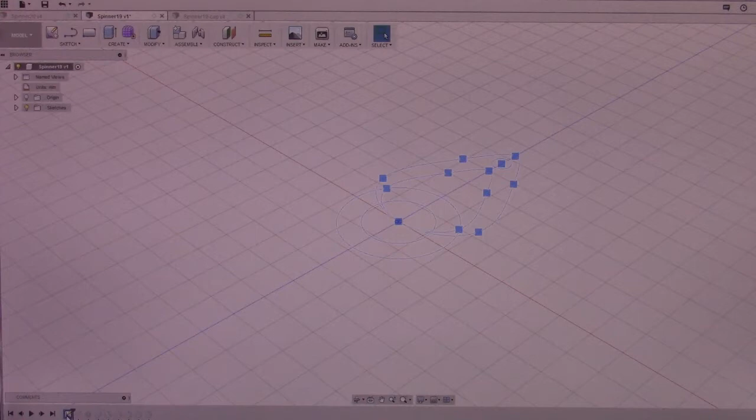So how this is designed, you have the center circles as usual for the placement of the bearings. And then I have a spline that goes out all the way, comes back down, and you can see the points where the spline was placed. And then the same thing, this one was actually resized to fit this size, that way it was uniform and I didn't have to recreate the spline. And then I created the circle that will be extruded or cut out in the final for the placement of the 1/4 inch ball bearings.

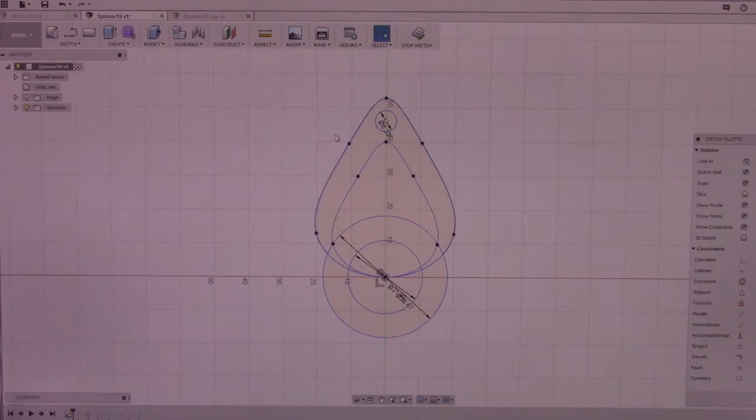So I extruded that design out for the initial one, and then I did the circular pattern to copy it around like this.

And then I did a combine simply to make the fillets work more like what I was expecting them to. If you don't do a combination before you do the fillets, sometimes you can have odd things happen where it wants to do a fillet in the reverse position than you think it should be.

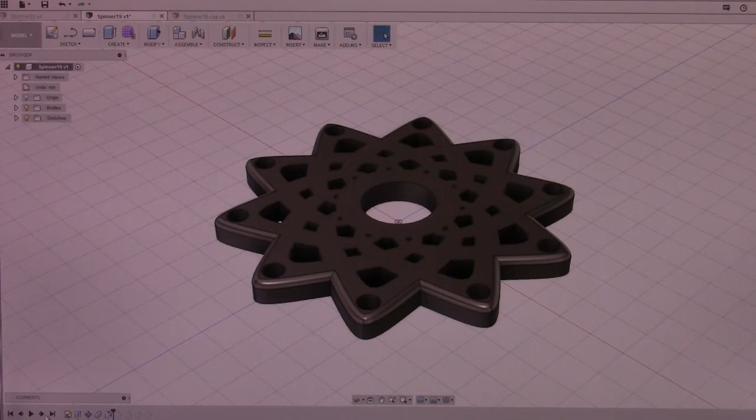The hiccups are getting worse. Anyway, I did a fillet on the outer edge, then a fillet on the bottom outer edge, and then fillets around all the holes. That second one was doing this section on the bottom, and then I do the same on the top with the next. You could go ahead and do smaller fillets for each one of these as well, but in the case of this, that's selecting 5 lines for each one. So with the 2 sides and the 10 going all the way around, that would be about 100 lines that you have to select just to do that row.

So for this design I didn't mess with it. You're welcome to do whatever you would like with your own designs.

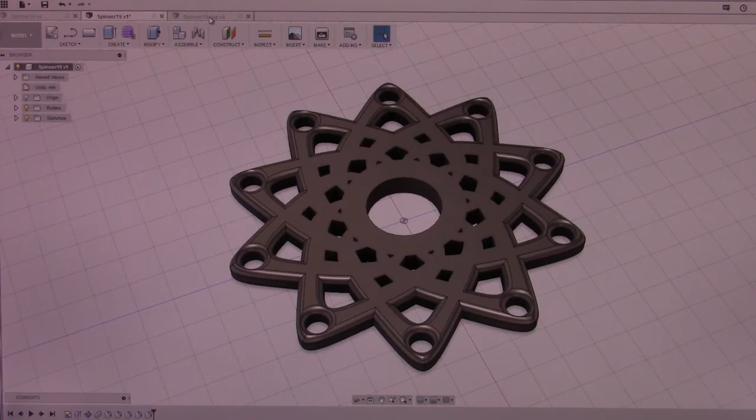The cap for this one, I went with something different. It looks the same from the top, and I've started doing split caps, which actually helps them fit better. But I went with like a flower design on the inside.

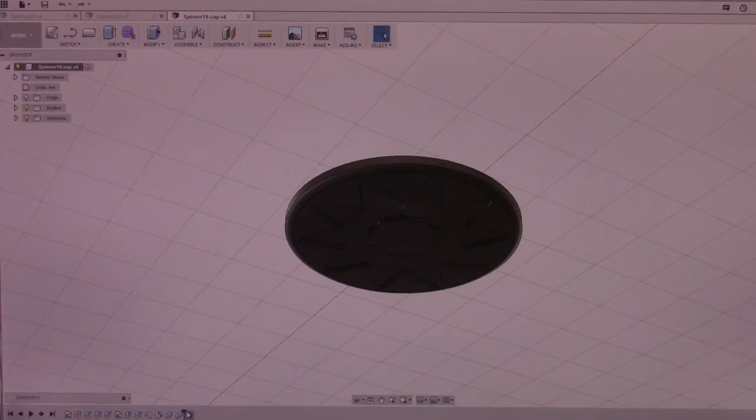This is basically, you can let me roll back to the sketch. I did a single spline around. Actually, I may have copied it from the spinner itself, most likely I copied from the spinner and then dropped it on here. And then I did the circular pattern to copy it all the way around.

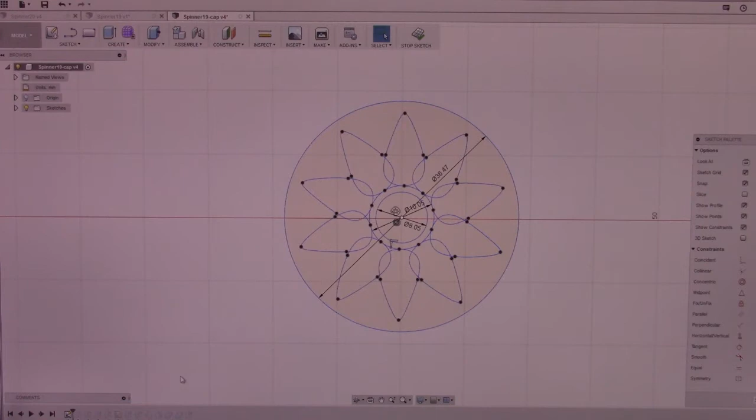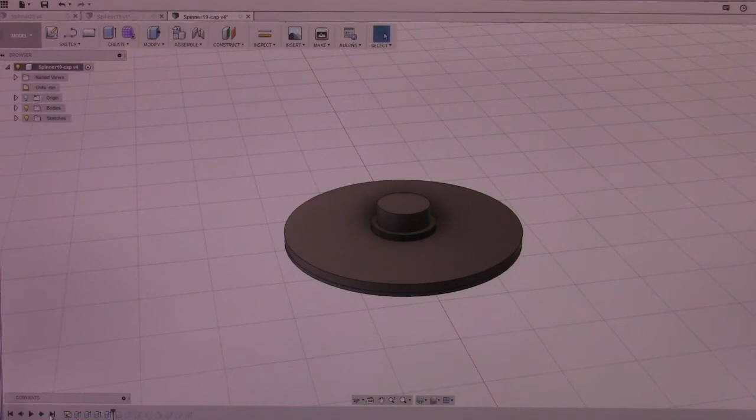Then when you do the extrusion, I did an extrusion for everything except for the flower. Then I finished that part up for the actual cap, and then I worked on the spacer and the actual piece that goes in the hole, and then I created the inner hole and the rectangle that helps it fit a little better. And then I chamfer the top to make it slip in a tad bit easier to begin with.

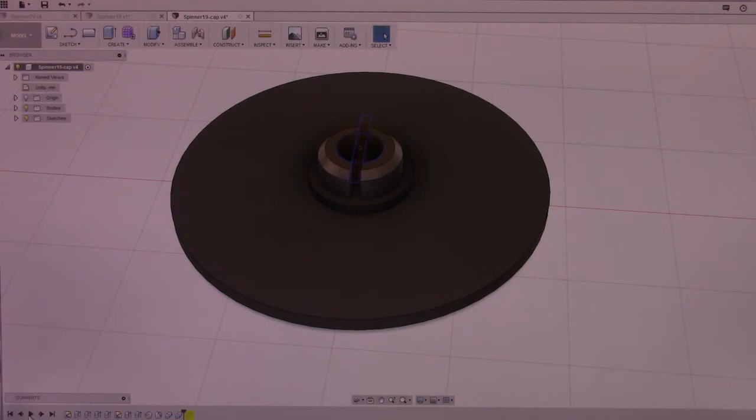And then I did a fillet on the top, and then I did the necessary combines. That last part isn't actually there. I did the combine just so that when you actually go to generate the 3D, the STL, it generates properly.

Alright, so on to spinner number 20.

So this one is a similar design. It's still a lotus blossom type of style, or that was the intention. It just looks much more complex. So let's roll back to the sketch. Pardon me for the hiccups still.

In this case I did a single sketch. It was a copy from the previous, and instead of starting this one and this one at the same point, I actually offset them, since I planned on placing the ball bearing in between. I didn't need the extra space available in the actual blossom or petal, whatever you would like to call it.

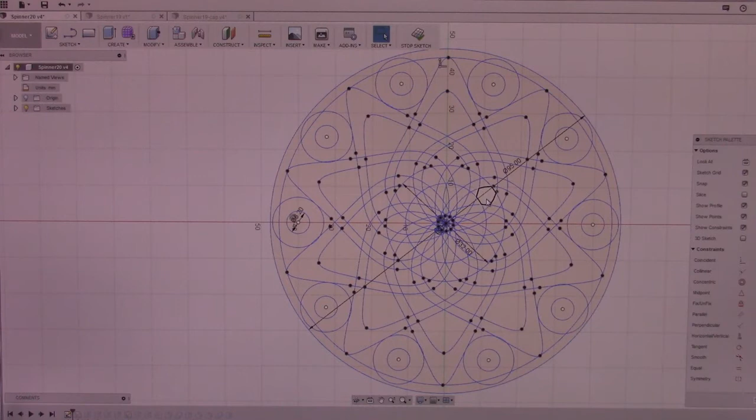Then I did a circular pattern all the way around for the circle where the bearing goes, the outer edge, and the lotus blossom design, as well as the two circles that hold the bearing in place. So I'm going to stop that sketch, and

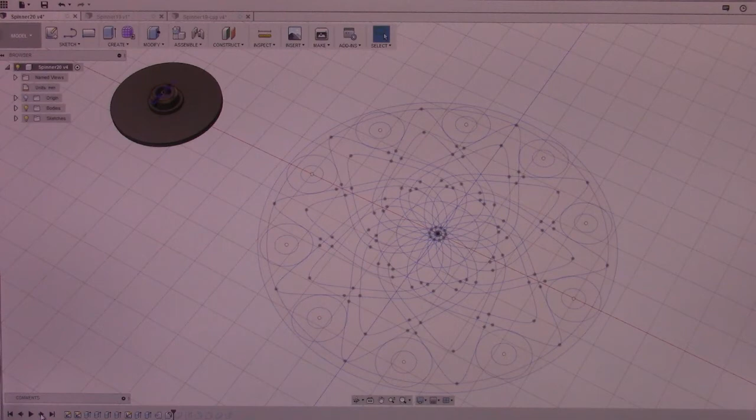this sketch, the second sketch that's on the history, is for the cap, so we'll just skip over that for now, because I did it slightly out of order on this one. I actually designed the cap first, and it's identical to the other cap, just a slight difference in size. Okay, so back to the spinner itself.

So this is extruded up to 7mm, which is the height of the bearing. Selecting all the parts to extrude up can take a while, because each of those tiny little parts has to be individually selected. Although arguably it would have been easier to select everything and then deselect the components that didn't need to be extruded.

And then I did a fillet, pretty deep fillet, on the top and the bottom for the outer edge, and for the inside of where the steel shot or steel bearings are actually placed for the weighted edge. Then I actually came back through and redid the outside edge, a little tighter fillet, and then the combine to make sure everything shows up in the print like it's supposed to.

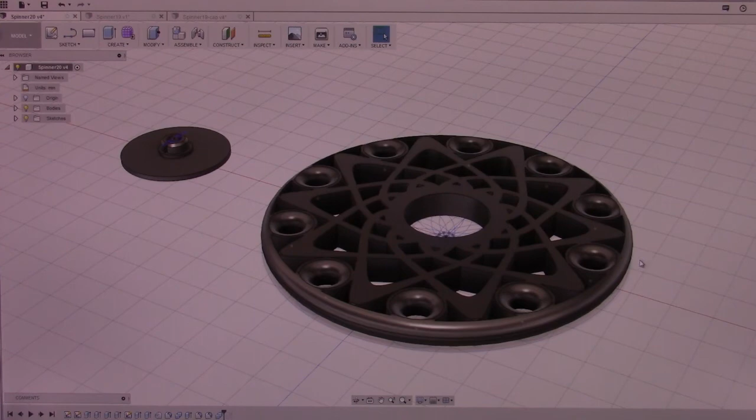So while it looks like a much more complex spinner than most of the previous designs, in actuality it doesn't take that long to create the design. Once you have a general idea of what you want to do in your head, you just need to fiddle around with it. But by being able to do the patterns, it makes very quick work of the overall design. So let's take a look and see how they turned out after they were printed.

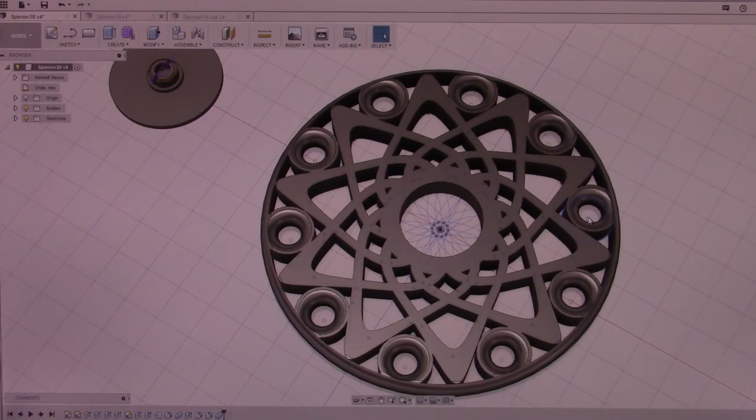I still have the hiccups, so I don't want to do 400 edits to remove them, so I'm just going to apologize now for the hiccups.

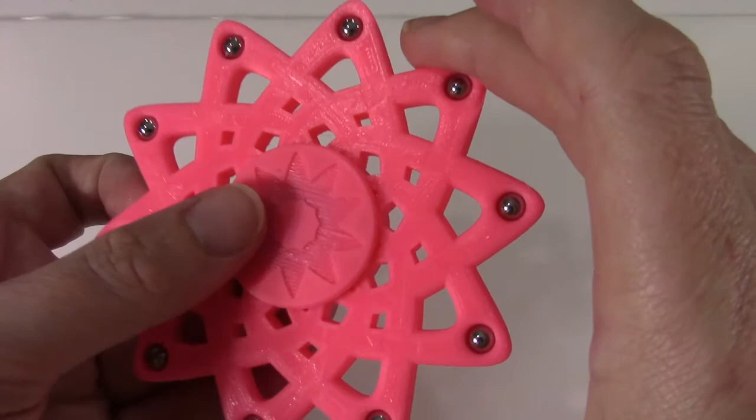So here's number 19. If it was printed in ABS with some acetone smoothing, it would come out quite a bit better than it is with the PLA, but overall it actually spins quite well. It's a bit of a gyroscopic effect because there is a fair amount of weight around the perimeter.

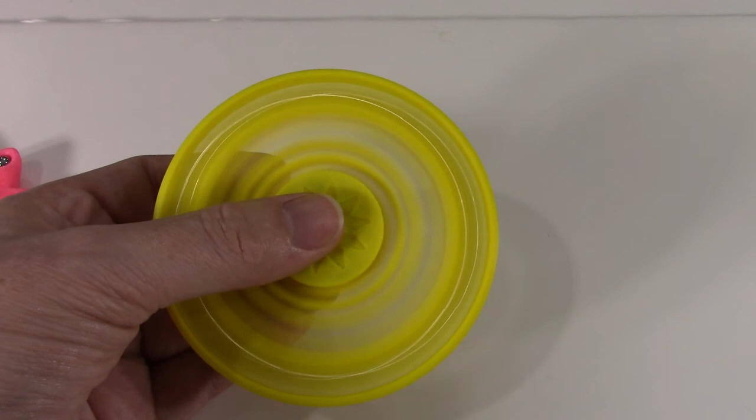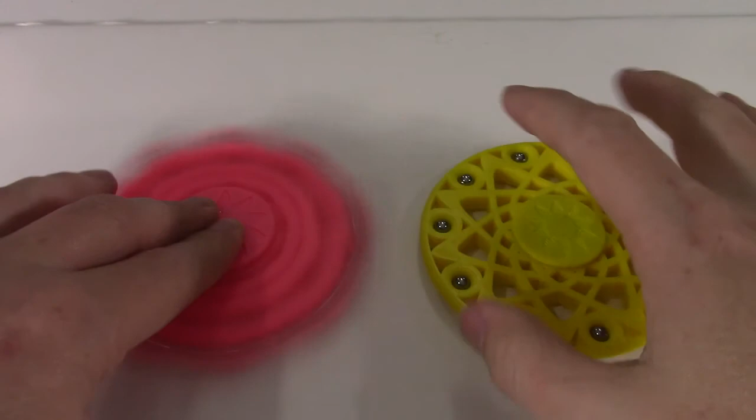And this is number 20. Again, this would work better in ABS and smoothed. This bearing is quite a bit noisier than the other, but other than that, I think it actually spins better. So there are those two. There's 19 and 20. And get those going, stacked on top of each other.